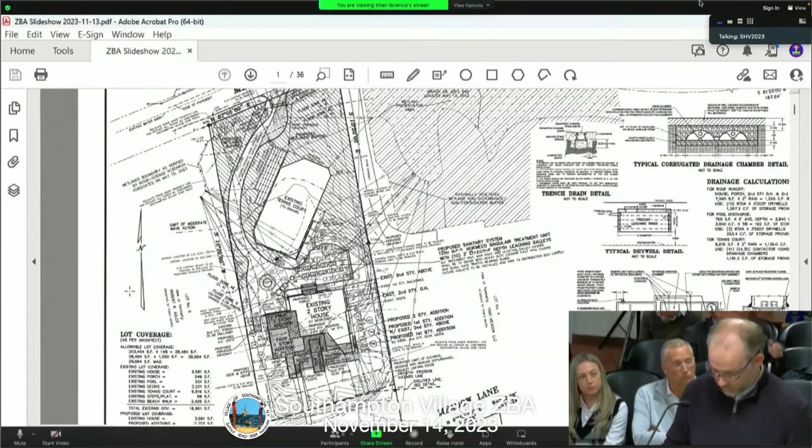So CMAC went and met with Tian and had a conversation about where the fence can go and how we may want to label it, because we're going to have to show a fence later on in order to comply with pool code requirements and such. So CMAC worked out a specific label. Instead of just saying deer fence to be removed, we have labeled it as deer fence, relocate fence inside property line, and replace all fences with conforming Southampton Village Code fence.

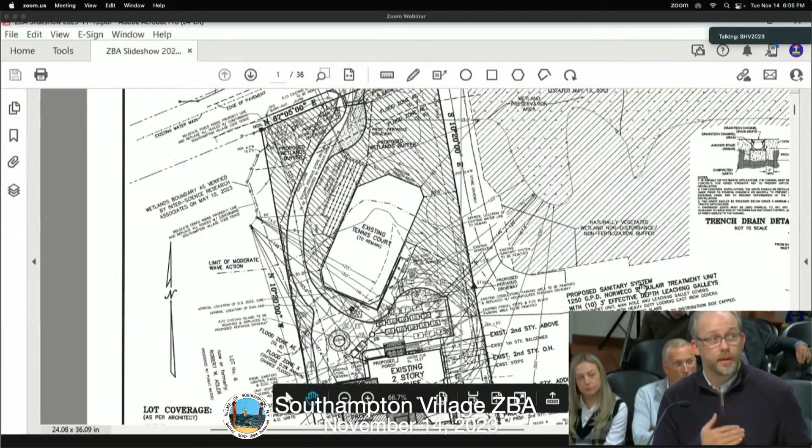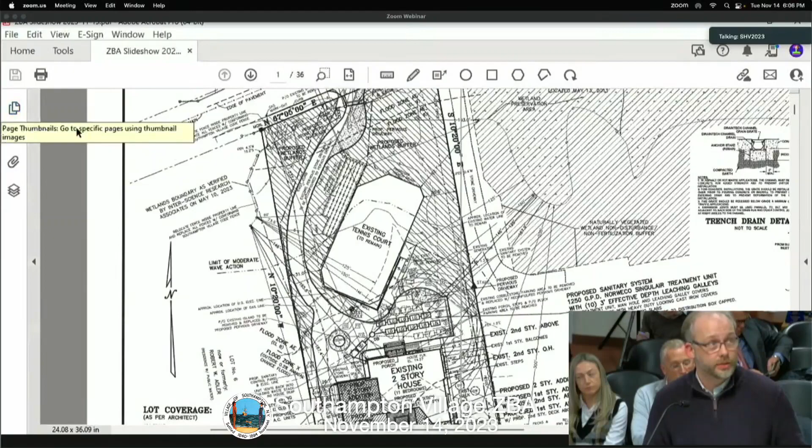So any fence that is shown on the plan right now, we've made sure that that is what we're going to do based on previous conversations with this board, and information that Alex Wallach had provided at the last meeting. Fences are not generally specifically referenced to this board, so we just want to make sure that the important part is that it will be removed off of the neighboring properties, the neighbor's property, and outside of the wetlands jurisdiction. But we're going to make sure to work with Tian on that later. But it's on this, so it would be part of the approval as part of that.

The second question, kind of broadly speaking, was about site drainage. Nelson Pope and Voorhis had asked us to evaluate whether site drainage would be adequately addressed with the proposed site plan.

So first to start, just note that there is no existing drainage at all. The house doesn't have anything. The tennis court doesn't have anything. There's no pool, dry well. There's nothing, and the existing driveway, which we have previously indicated and confirmed, is impervious. It's oil and stone with gravel on top of it. So we're changing the driveway out to be a pervious gravel driveway. It's going to have a 40% open void, so it will be able to contain its own runoff.

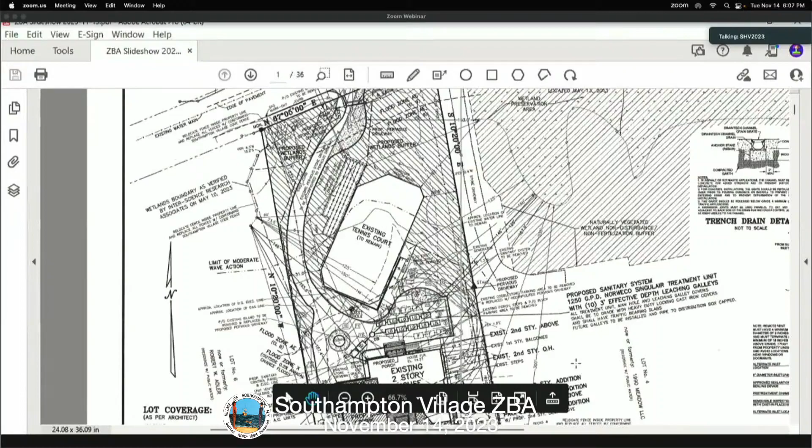In the event of some type of freezing or soil compaction, we are also going to be adding a trench drain at the entrance of the property to capture anything else, to make sure that anything from that area wouldn't get into the village's right-of-way.

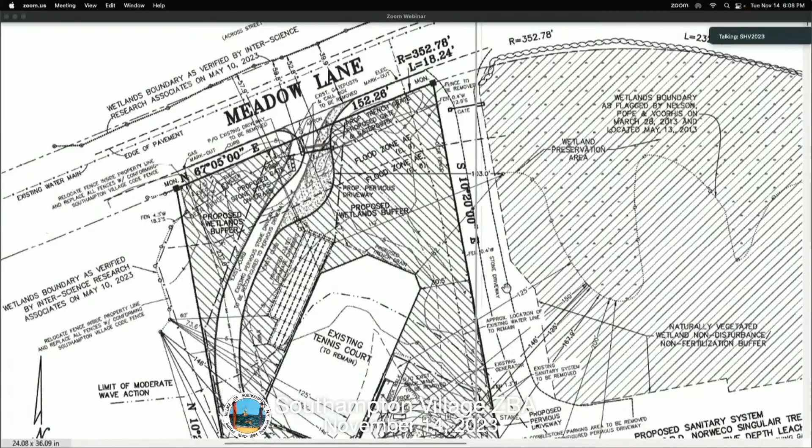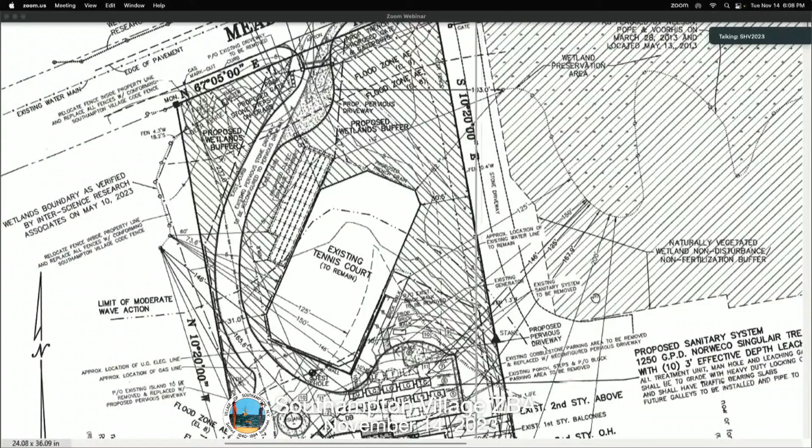As previously asked by this board, we had also added a Cultec drainage system for the tennis court, which is going to capture slightly more than what we have to, like 50 cubic feet over, but we are making sure to capture any drainage from the existing tennis court. We're also proposing drainage for the house where there currently is none.

In addition to drainage, after development we have also indicated where a proposed project limiting fence is going to go during construction, to ensure that during construction we don't have movement of soil and stormwater off the property, either to neighbors or onto the village right-of-way.

I also would just like to note that we are proposing to disturb less than 1 acre, so we won't need a stormwater pollution prevention plan. It's about 38,000 square feet or so. If we were closer, say at 42,000 instead of 43,560, I would probably recommend we do a SWPP anyway. But at 38,000, it's not like we're going to accidentally go over during construction. So that part has been addressed.

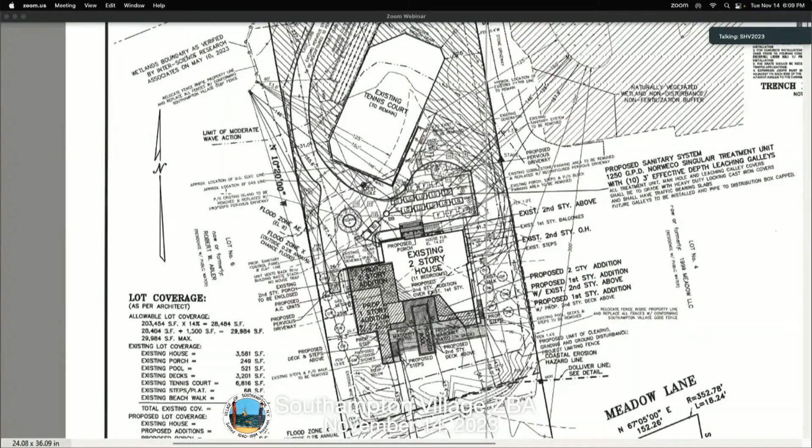So with the addition of drainage where there currently is none, we are improving the conditions of the property as a result of that.

One of the other things that Chick had asked us about, both in the meeting and in his memo, was whether we could expand the buffer to a setback of 125 feet.

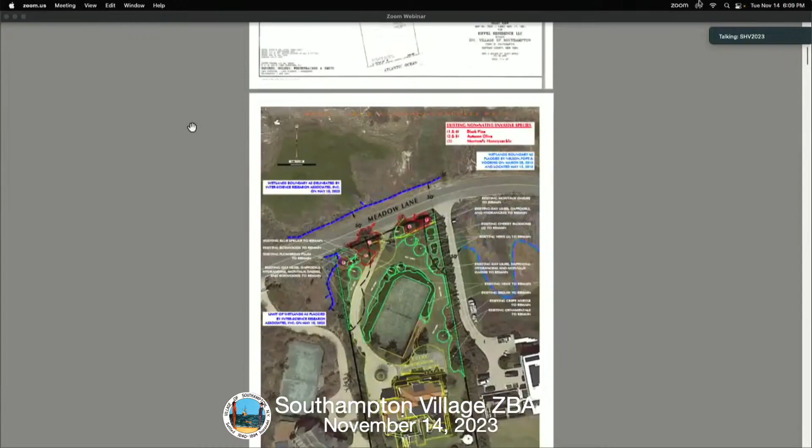Just stop on the existing conditions first, please. Oh, no, the existing planting. Yeah. This was previously submitted, but it's just important to see where existing lawn areas are. Existing lawn in those areas. There is ornamental vegetation that isn't lawn.

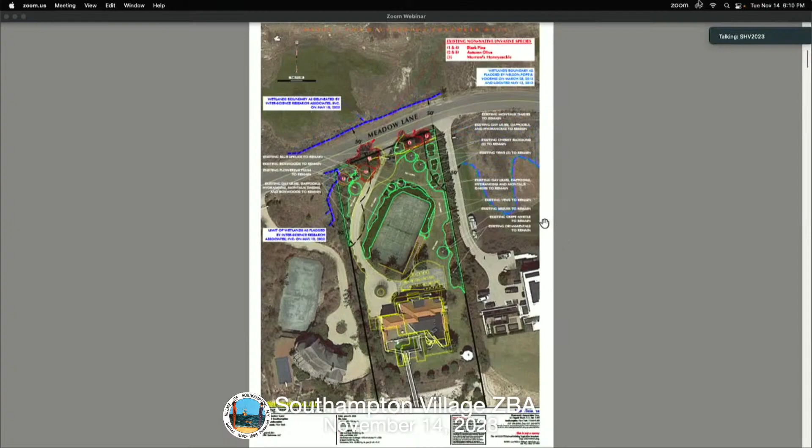Per previous discussions with Chick, he had said that we could keep any ornamental or landscape vegetation that wasn't considered invasive, that wouldn't spread into the buffer areas after taking out the lawn. So we identified a number of plants you can see in red at the north side, including some honeysuckles, black pines, autumn olive. All of the invasive species are going to be removed and replaced with either trees or shrubs, depending on what is being taken out. But existing landscape vegetation will remain.

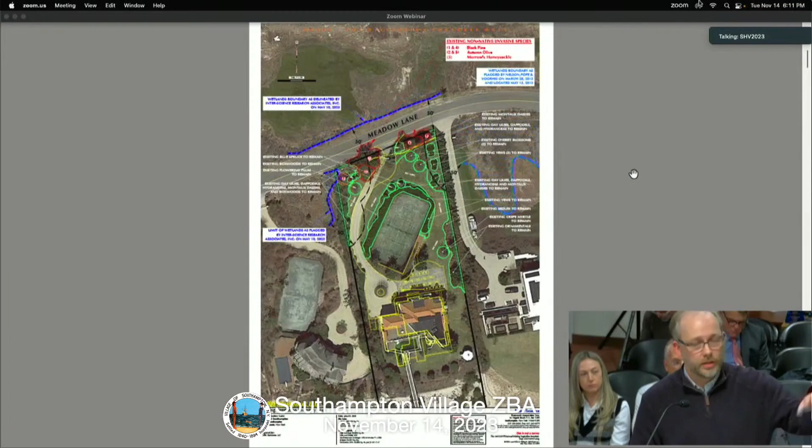Can you go to the next screen there? Previously we had proposed a 50-foot wide buffer, and we have increased the size of that to 125 feet, which you can see here. The areas of lawn are going to be planted with a mix of little blue stem and switchgrass, with some additional shrubs and trees spread out throughout that area.

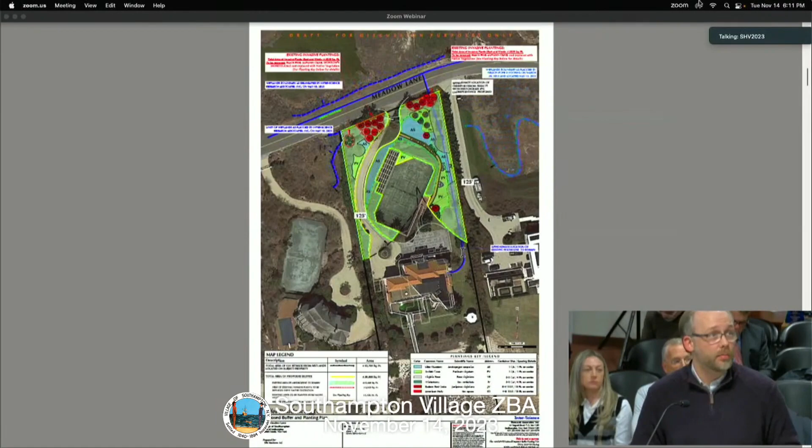There are some existing trees just to the northeast, Sabrina, of the tennis court, I just want to confirm. Yeah, so there are some existing cherry blossom trees that are going to remain, and we're planting around the base of them to make sure it's still a thoroughly contiguous buffer.

And then for the point of maintenance and also for access around the property and the tennis court, we're also proposing a 4-foot wide mulch path that goes around it, which is typical for wetland buffer drawings, especially where we're significantly increasing the amount of native vegetation on site.

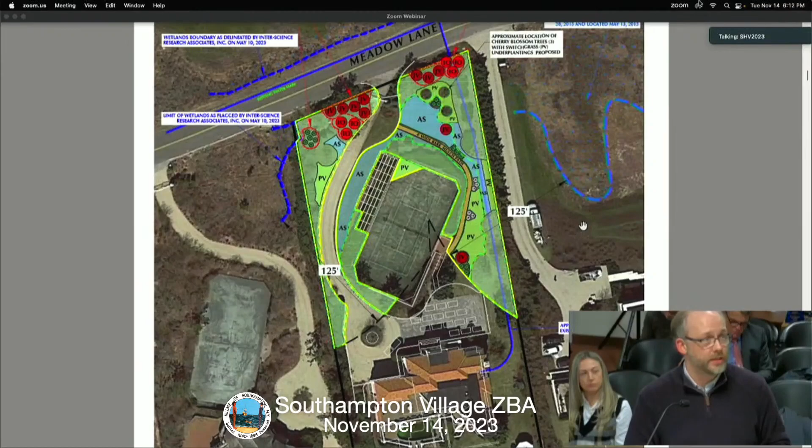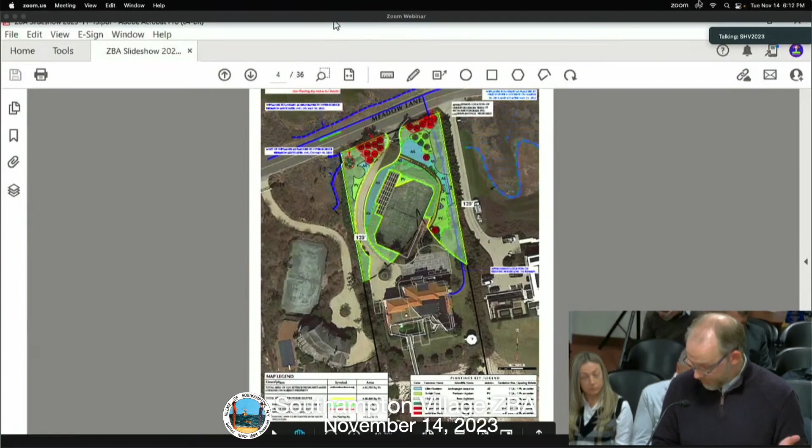To that end, we have increased the size of the buffer that was previously proposed. The previous one was 6,595 square feet. We've increased it to 20,408 square feet, so that's about 13,800 square feet more.

And we're also proposing to convert—I believe Sabrina's working on getting the previous plan side by side—there you go. The amount of lawn that we're converting to buffer area is 5,326 square feet. So we've really tried to, based on the village's consultants' comments, improve the environmental quality of the property, as well as the project itself.

In addition to the drainage that we're proposing and the buffer, just to remind the board, we're also upgrading the septic system to an IA OWTS. So as a result of all of this work we've been doing with the zoning board and the changes we've made, we think this project will wind up having an environmental benefit to the property if a wetlands permit is issued. And that's the end of my stuff.

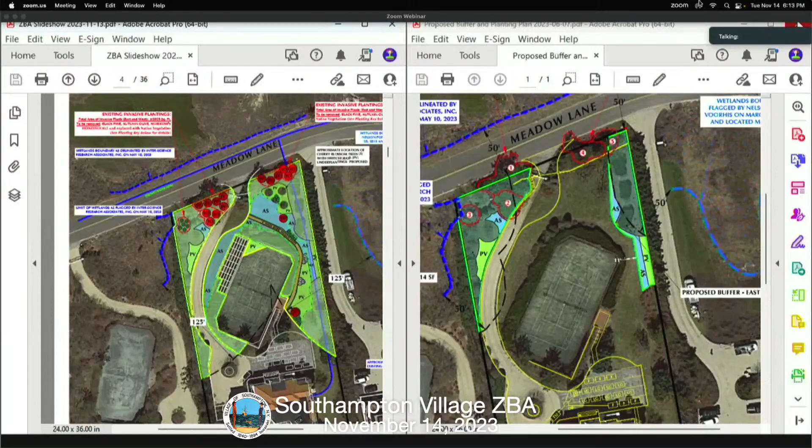CMAC, do you have anything to add? Basically updated numbers, making sure that CMAC and the architect confirmed the numbers are in accordance. The numbers I quoted you last time are correct, but now the survey has been updated to reflect that.

That's it, that's what we got. So we're here to answer questions. We've been at this for like 6 months or so, I think, so we'd love to wrap this process up.

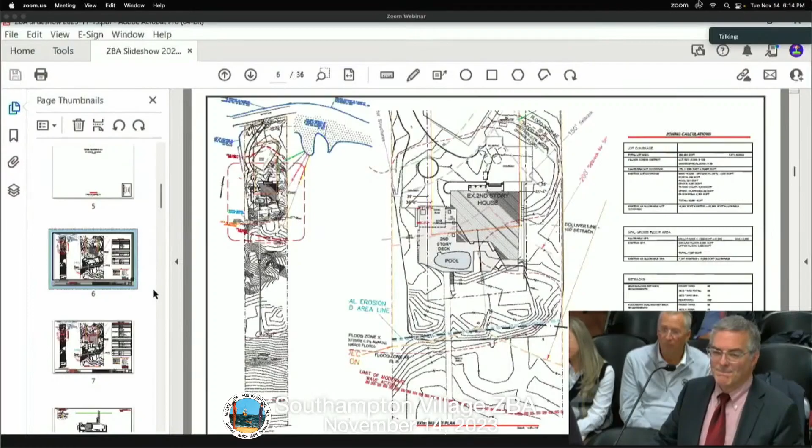Do you have questions? I do not. No, you're right. Can we find out if Joyce Gifford has questions? No, I don't. I mean, we definitely appreciate all the thoughtful work that you put in to bring this case to this point. Thank you. Indeed. Alex, did you want to say anything? No.

Okay, so where do you want to leave it? Do you want to adjourn for all purposes? Love to close. Okay, I'll motion to adjourn.

Mr. Chairman, is there anybody from the public, or anybody on Zoom, who wants to be heard? Is there anybody in the audience who wishes to be heard in case number 3156, 2020 Meadow Lane? Okay, so I'll motion to close for all purposes, case number 3156, Eiffel Residence LLC, 2020 Meadow Lane. Can I have a second? Second. And all in favor? Aye. Aye. Aye. Okay, thank you.

Next case we have is case number 3160, Gary Flanagan, 20 Hillcrest Lane. Is the applicant here?

I'll motion to adjourn case number 3160, Gary Flanagan, 20 Hillcrest Lane. Can I have a second? Second. Which date are we adjourning to? We're going to go to our next meeting in December. Alex, can you help me out with that? I believe it's December 12th. So I'll motion to adjourn case number 3160, Gary Flanagan, 20 Hillcrest Lane, to our next public hearing, December 12th. Can I have a second? Second. And all in favor? Aye. Aye. Aye. Okay, so moving on to

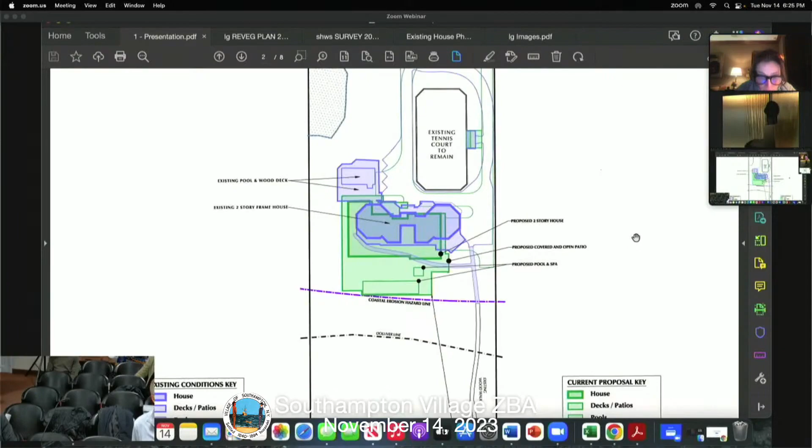So what we've shown here is the existing in blue and the proposed in green. You'll see in this area the retreat of the swimming pool back in this area. This is the coastal erosion hazard line. Here's the proposed swimming pool moving from here to here. This is covered decking on the upper part and lower decking down through here. This is the proposed home.

The next overlay we provided is an overlay of what had been approved in 2006 versus what is currently proposed. In this diagram, what had been approved is the blue, and you'll see that the swimming pool is no longer there. They approved the swimming pool going from there to this location in blue, and they approved the garage with a roof deck in this area.

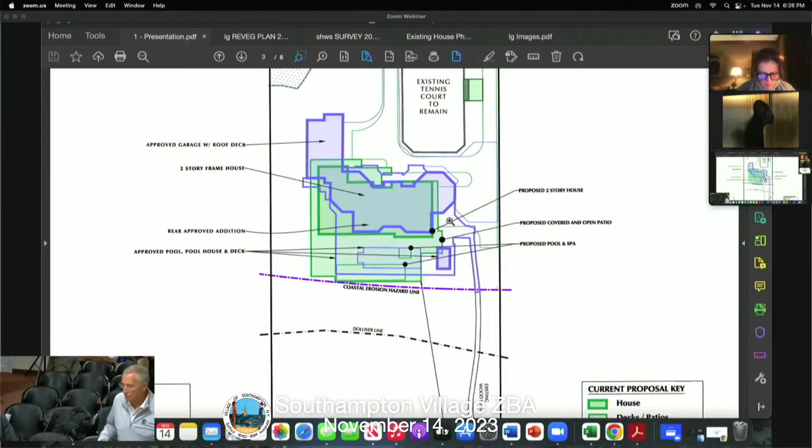Our proposal retreats from this setback from here down to this green line, which is decking, and the house back through here. The house is this bolder green line, and our swimming pool is here. So generally, the improvements we have proposed are relatively consistent with the footprint of the existing and proposed improvements, with the exception that we are showing retreat from the wetlands.

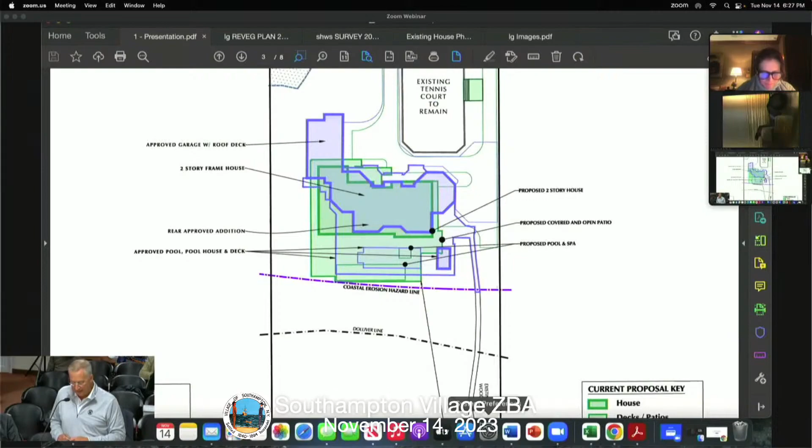As you're aware, this application requests relief from the 100-foot setback from the 1982 dune crest established, called the Dolliver Line. At the last hearing, Dr. Wisher discussed the history of the significant dune building and the seaward expansion of the dune feature on the property line. It's our opinion that because there's been such a gradual but dramatic change in the widening of the beach in this area and the dune conditions, the Dolliver Line is really a relic. It really should not be made applicable to construction today.

The coastal erosion hazard line that was established by coastal specialists from the New York State DEC really becomes an appropriate restrictive barrier for limiting the seaward edge of development. This project is entirely landward of that boundary.

Section 116-8D1 of the Village Code requires that on all ocean beach water frontage, all buildings and structures shall be set back 100 feet shoreward from the crest of the first rank of ocean beach dunes. The village has 6.7 miles of shoreline, about 35,260 linear feet. This provision of the 100-foot setback from the first rank of ocean beach dunes affects 5.5 miles of the village, about 80% of the shoreline.

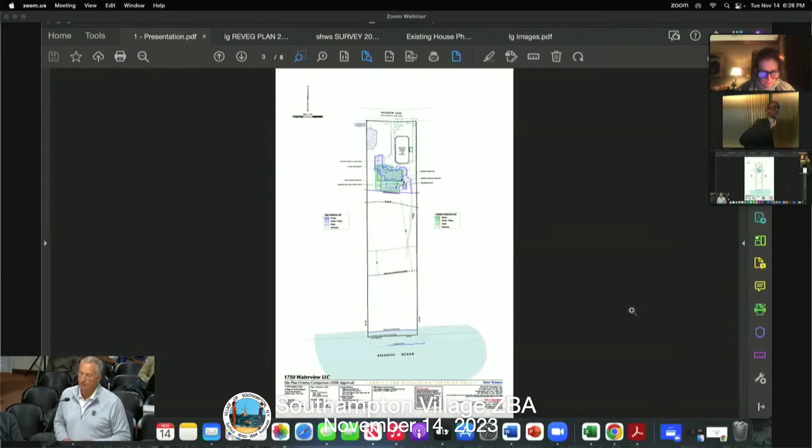The 1982 Dolliver Line restriction affects 1.1 miles of the shoreline, on the western part. When this line was established, it was mostly an undeveloped area—just west of, I think, the third or fourth house west of Road D. That whole section at the time had a dirt road, and homes were really just being considered in that area.

The property owners that you see today in this area are being subject to using a dune crest line that's 41 years old. It's not representative of the conditions that are here.

If you can put up the aerial. So this is a comparison of an aerial photograph on the top, which is 1983, the closest we could get to 1982. We marked the shoreline in this blue line, and transposed that over to what it looks like in 2023. You can see a dramatic growth. Look at where the property boundary lines are, look at where the beaches are. This is further evidence of what Lee Wisher had produced in the document, that this area is growing and it's also stable.

We also provided the next slide. This is an aerial from this section, which shows the Dolliver Line versus dune crest lines. This red line is the Dolliver Line. These are village-owned properties, so we don't have the Dolliver Line for that. But the Dolliver Line is in red, and these green lines you see are all from different surveys. Those you'll see some we don't have because that information was not available. But you can see the disparity between the Dolliver Line and the dune crest line on these properties. The Dolliver Line does not make sense in 2023.

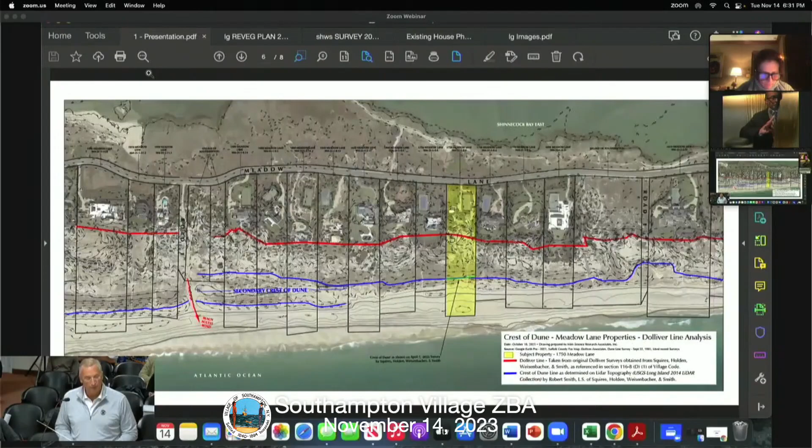The next drawing we also provided to you is one where we overlaid topography from LiDAR on top of the same aerial I just showed you. This is topographic information, 2-foot contours produced by U.S. Geologic Survey. Smith, Squires and Holden, who's our surveyor, is well respected and known. Their firm has 120 years of experience surveying in the village of Southampton. He's probably one of the most knowledgeable surveyors we've worked with. We asked him to identify the first rank of ocean beach dunes, which is what your section of the code speaks to.

That's the blue line. The Dolliver line is the red line. The blue line is where he says is the first rank of ocean beach dunes based upon topography. He saw there was a secondary dune system forming in this area, with the first rank of ocean beach dunes being out here, west of us. That's probably because of the groin and jetties from Shinnecock Inlet, further west, and this is just continuing to build out further the more west you go.

What's also interesting is we had him place on this drawing the location of the surveyed dune crest line from a site-specific survey on our property, shown as the green line. You can see that the green line and the blue line, taken from the LiDAR maps, are coterminous — they're on top of each other. So it gives you some sense of assurance that the lines he's drawn are accurate.

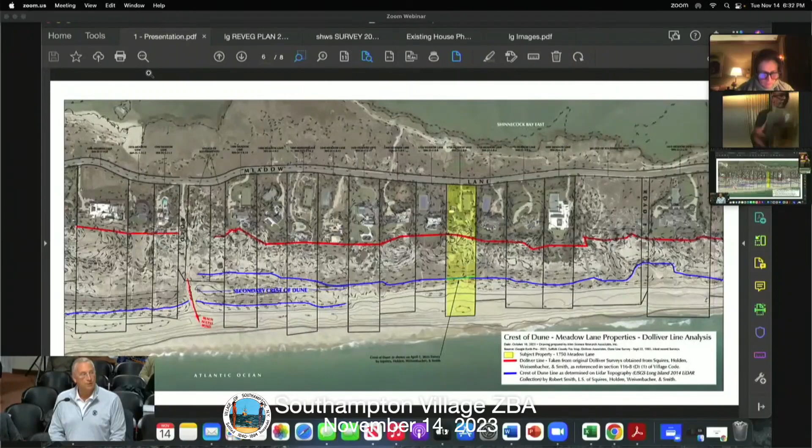So the drawings we're required to use are showing 41-year-old dune crest lines. Bob Smith also provided us a letter that you have in your file, stamped and signed, stating it's his opinion the Dolliver line is no longer relevant as the dunes have replenished themselves naturally. However, the Dolliver line still remains part of the code.

The improvements on this site are proposed 330 feet from the first rank of ocean beach dunes, where your village, for 80% of the village, requires a 100-foot setback. We're not asking to go to that 100-foot setback. We're asking to be able to go to the coastal erosion hazard line, which is a more appropriate seaward boundary.

We also provided you, back in the September meeting, an aerial photograph, and this is that photograph showing the location of our improvements as they relate to the houses to the east and west of our home. This is an overlay of the proposal on top of an aerial photograph showing existing conditions. What we did, as part of the design strategy with the client, was make sure they weren't going to interfere with the neighbors, because I think that's important.

So we had two lines drawn: a line showing the seaward edge of the homes, the seaward edge of the front home. Our house is behind that. Front of the pool, our pool's behind that. We wanted to be sure that we're sensitive to the neighbors.

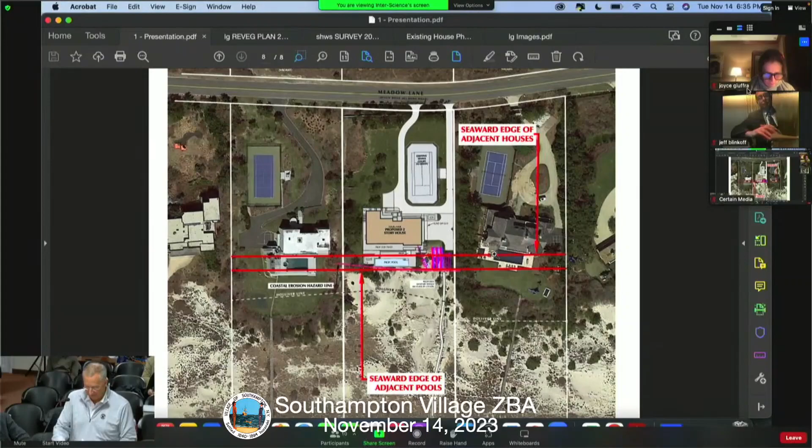We received the Nelson Pope and Voorhis memo last Thursday at 10 o'clock. Your filing deadline for additional information was 12 o'clock Thursday, so we couldn't actually respond. But I want to go through a couple of the things with you just to let you know that we are going to respond back, hopefully in a helpful way. They identified a number of things in their memo that they asked us to respond to.

They asked us to modify the plant inventory to include additional diversity of native plants. LaGuardia Design is working on that now. So we'll be back to you at the next meeting with some additional details on the landscape plan.

Even though the plan includes considerable retreat of the overall structures from wetlands, item 22 and 27 discusses the position of the improvements in the northwest corner. That's this right here, and its relationship to wetlands, and speak about its degree of nonconformity to the wetland setback. Stelle Lomont Rouhani, the architects for the project, are examining that right now to see if we can address that issue to ease up some of that setback in that corner for you.

Although, again, we'd ask you to recognize that the wetlands in this area are deteriorated. They've been that way for some time, and they're of low quality, which will only improve with the work that we're doing. Item 25 and 28 indicate there's no separation between the seaward edge of the pool and the beachfront area and the dunes.

So I actually question whether or not the reviewer spent a lot of time looking at this, because I understand they're saying that this area through here, and actually the quote in the memo says, the beachfront area, including the top of nearby dunes, where neighboring properties each have landscaped and naturally vegetated areas, separating their pools from the beachfront areas and dunes. So our client wants to have a duneland habitat.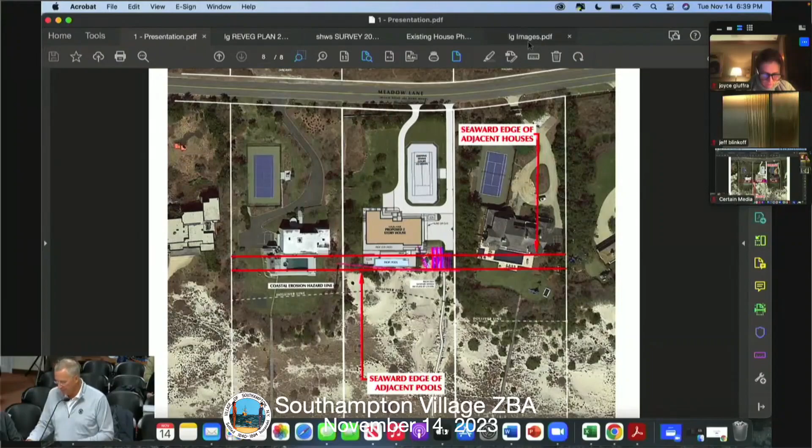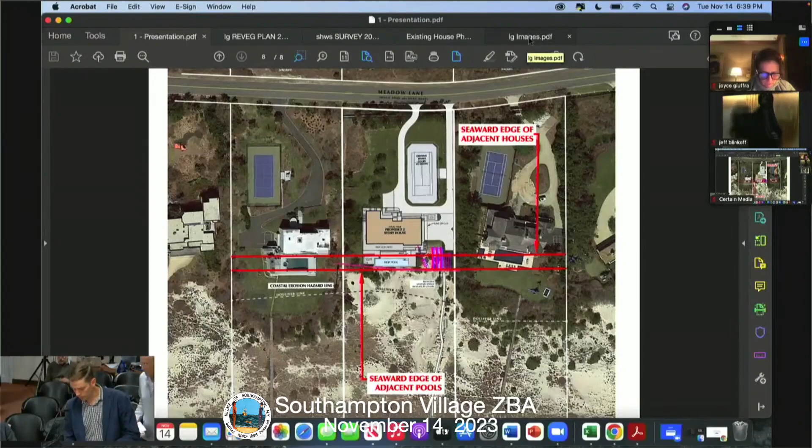I'm going to turn the presentation over to Ian Hambeck, just to talk a little bit about the landscape plan that's been submitted to you, and then we're here to answer any questions you might have. Ian Hambeck with LaGuardia Design for the applicant.

I think Rich touched on a lot of the great aspects of this project. I'm going to go over a few of those again at a high level and then touch on some things on the freshwater side that he didn't necessarily focus on or speak to in detail.

I'll start by saying at our firm, when we take on a project, we ask ourselves three questions - this is our litmus test. Is it an interesting project? Does our shared vision with the client align? And are we going to make a meaningful impact through our role as landscape architects on the project?

When you think about the interesting question, this is obviously the type of project every designer wants to be involved with - coastal project, blue chip quality. I'd say that aside from the panoramic views you get on the ocean side looking out over the beach, we view the freshwater wetlands as equal to that in terms of interest and quality.

When we initially met with the client, we shared that vision with them - that we thought the freshwater wetland relationship needed to be played up, improved, and restored. They met that enthusiasm and embraced the idea. They actually said it was a shame that the property was of such poor environmental quality, dominated by ornamental landscape and lawn, and they wanted to see that restored.

So when we start to think about this shared vision and the enthusiasm around it, we have to ask ourselves, through our design process and the regulatory process, are we able to make that meaningful impact? I think when you look at this application, the answer is yes. As Rich pointed out, on the existing property right now, it's a low-quality wetland - it's filled with Phragmites, there's a lot of lawn, a lot of ornamentals, but no natives of real note.

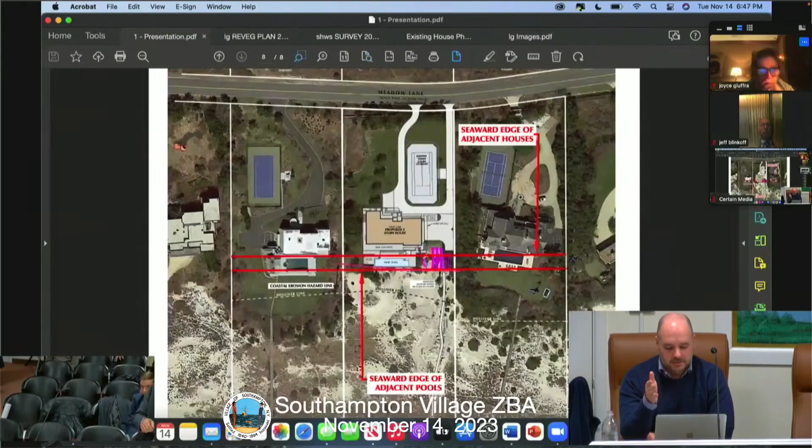That's in chapter 116 - I put my notes back there. But it's the first rank of ocean beach dunes that 80% of this village gets to use, and this is the first rank of ocean beach dunes on this property. First rank. First rank. So then where is the second rank forming, northward?

Second rank is probably some relic that's back in through here somewhere. We'd have to actually look to see where that is, but our position is that the coastal erosion hazard line, when you look topographically, doesn't even follow a crest of dune. It goes through hollows, and it was an attempt to create something like a coastal erosion line back then when there wasn't one. But this is a completely barren area that's relatively undeveloped at the time. How do we control development when you've got this first rank of ocean beach dunes? Oh, let's just shove it way back so it doesn't happen out in this area. But we now have better science now, and there's been such a change in the beach conditions since that was done, that these dunes have grown.

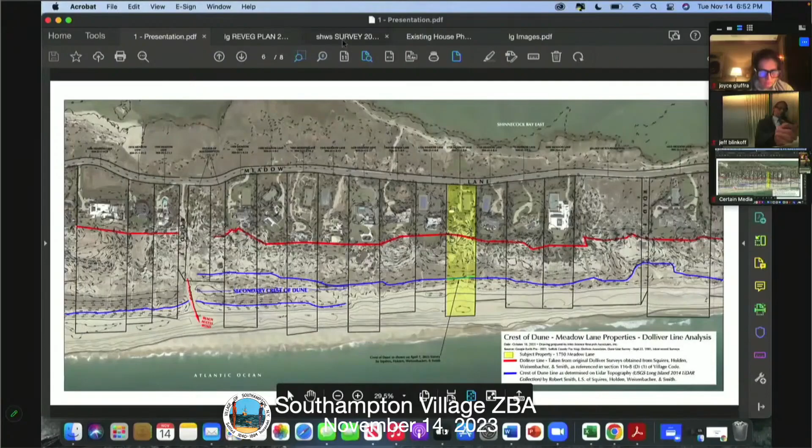And John, for sanitary systems, 200 feet seems to be the standard out here. I think 200 feet is the village regulation, the most stringent. No, what I'm saying is Southampton Town is the same. No, 150. Ian, what did we do on Noyac Road? Well, we're well beyond it, but... Okay, never mind. The town code is 150. I will represent that to you. Okay.

Here's the wetlands line up here. This is the access stairway in front, on the north side of the home. Those on Zoom can't see that, just so you know. While you're looking at that, just to fill the jurisdictional gap, the Suffolk County setback for a septic system is 100 feet from surface waters. Am I correct? So we're trying to meet the most stringent village standard. Do you mind zooming out a little bit?

This is when you need the music from Jeopardy. Okay, well, I get the gist. It's on the northwest corner of the house. I don't have any other questions.

Do you have any questions? Do we have any public? Wait, let's wait - Joyce, does anyone have any questions? Joyce, can you hear us? This is on mute. Yeah, her thing is muted. I think she's muted. She's trying to speak. No, I'm good, thank you. Sorry about that. Is there anybody from the audience who wishes to be heard, or Sage, is there anybody on Zoom that wants to be heard?

So we want to adjourn this to the next meeting on December 12th? Yes. Does that provide ample time to address everything? Yeah, we have a memo now. Excellent. And we'll take the comment about the Dropbox under advisement and see what can be done to organize that - no criticism of anybody in this room. Yeah, we understand.

Okay, so I'll motion to adjourn - let me get the right case number, excuse me. Case number 3155, 1750 Waterview LLC, 1750 Meadow Lane. I'll motion to adjourn this case to our next public hearing, December 12th. Can I have a second? Second. All in favor? Aye. Great, thanks for listening.

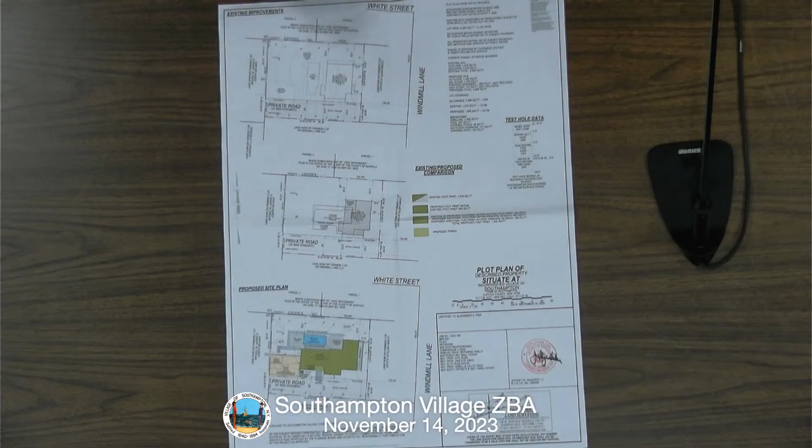Bailey, you'll correct me, you probably know the file better than I do. What we've tried to demonstrate here is what I was about to say: the bulk of the proposal is either located in a conforming location or where the pre-existing improvements are located.

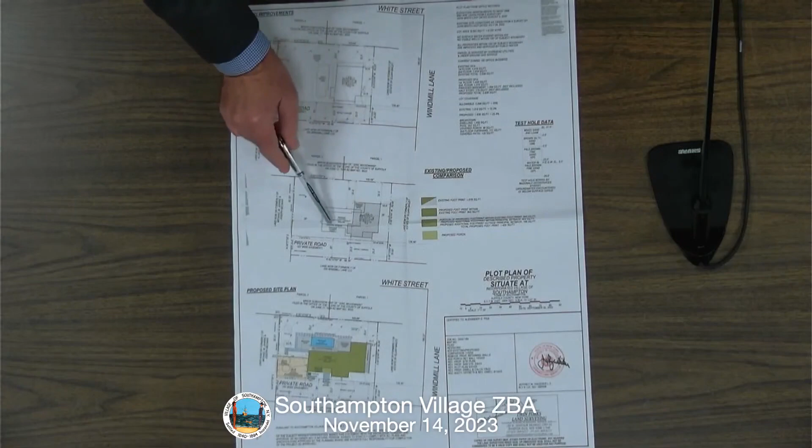These are the pre-existing improvements, that's the proposed addition, that's the proposal. We wanted to show you where the existing two-family dwelling is, and then compare it to the new proposal. But the bulk of this either respects the pre-existing non-conforming setbacks or is in an area that is as of right in terms of the setbacks.

Now, it's interesting what's going on here in terms of the setbacks, because our position is that the setbacks, and it's not only based upon our reading of the code, but also the way the village has handled lots on this access easement, including the lot at 205 Windmill to the south.

The property is a pre-existing non-conforming lot burdened by the presence of a 20-foot wide access easement along the southerly property line. This is really important because it shows that the requests for relief are nowhere near as significant a dimensional request as the building inspector claims.

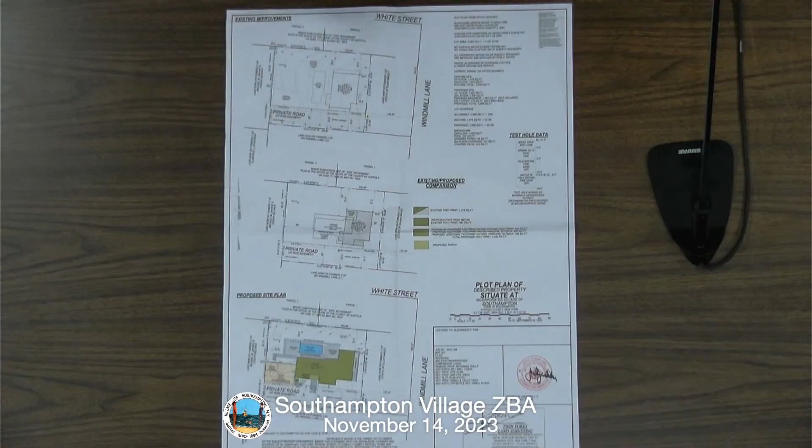So there's this 20-foot access easement. The surveyors called it a private road, but it's really not a road under the village definition. Let me explain to you why.

The easement serves as access to 4 residentially developed parcels to the west of the subject property. You go up the street, and there are houses up there, as everyone is aware.

So the applicant is the owner of tax parcel 904-5130. We included a copy of the deed in the application package, which includes the access easement over the property. The parcel runs beyond the southerly limit of the asphalt surface. So here's this access easement, but the property runs to the south, well south of the paved area.

This is the entire parcel. It includes this access easement. And I keep calling it an access easement because it's not a road, it's not a street.

This is the Village Code definition, 116-2. I want to remind everybody that the Court of Appeals has, on probably three occasions, said that zoning laws are in derogation of common law and are to be construed against the municipality.

So if there's any gap that hasn't been closed in this definition, I'm going to explain to you that there's a big gap as it relates to this access easement. If there's any gap, it runs in favor of the applicant. So this is the definition of a street.

Why am I going through this? Because it makes the application for relief much less significant. This is the definition: any federal, state, county, or municipal highway or road - none of those - or any street shown upon a subdivision plat filed in the county clerk's office. It's not one of those. There's no subdivision. These are what we call in the business described parcels.

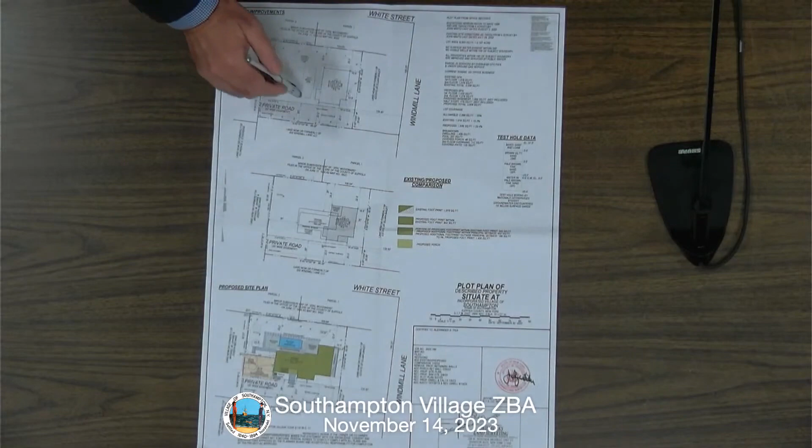Thus, it's submitted that the northerly limit of the access easement, which does not fall within the definition of street, should not be utilized in calculating the lot line front for purposes of setback, which is what the building inspector did. He took it from the northerly line; it should be from the southerly line of this access easement.

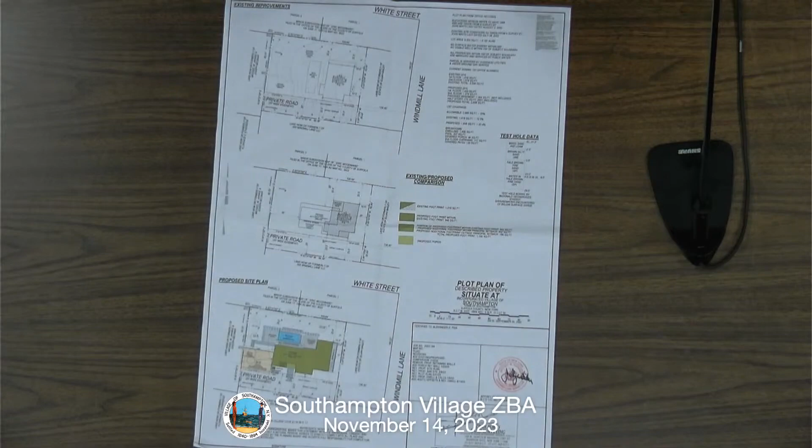Although relief from the front yard setback of 35 feet is still required to construct a portion of the proposed residence, it is submitted the relief needed is to construct the proposed residence 23.5 feet from the front yard, where 23.3 is existing, rather than the indicated 3.5 feet of setback relief in the turn-down letter. So we want to construct a proposed residence at 23.5, where 23.3 is existing.

And it should not be taken from the northerly side, but rather the southerly side of that access easement. We also object to the inclusion of the area within the private access easement in the overall lot area. Village Code 116-2 defines lot area as the total horizontal area of a lot, exclusive of land in the bed of any street, right-of-way, or waterway. It's none of those.

Accordingly, since the access easement of the subject property is demonstrably not a street as defined within the Village Code, the entirety of the parcel, including the portion burdened by the access easement, should be included in determining the lot area.

We submit this by definition alone, that our interpretation is correct, and we see no other fair or reasonable interpretation under the case law, where it says any ambiguity is supposed to go in our favor. We don't think there's an ambiguity here. It just isn't captured - this access easement is not captured within the specific definition of a road or a street.

But we also included in our application a copy of a survey for the adjacent property to the west, 205B Windmill Lane, where a building permit was issued for the construction of a proposed swimming pool. The front yard setback was permitted to be measured from the southern limit of the property, not the northerly boundary line or access easement across the property.

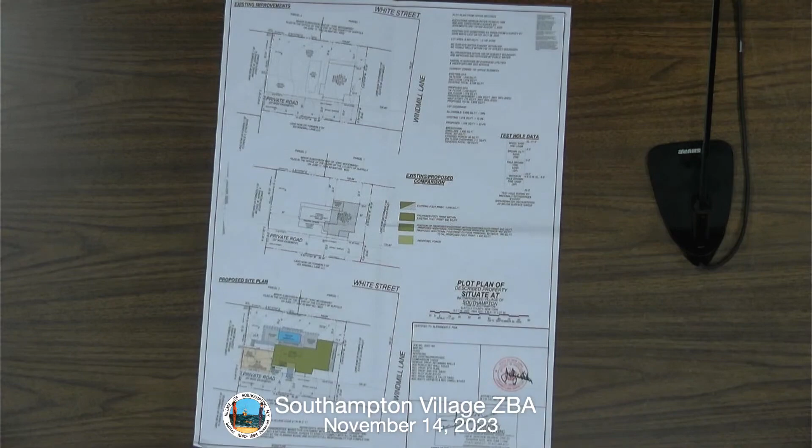Excuse me? Yeah, John, do you have a copy of the agenda? Because that's what we're looking at right now. Billy, that's incorrect? That's incorrect. Okay, but if you could speak to 5.3. Yeah, no, our survey shows on here, sorry, I just moved it on you, 3.5. Okay, so it's 3.5, not 5.3.

And what we're saying is that the 20-foot right-of-way should be included, included. So we would have 23.5 as our front yard setback. That's what I'm trying to find. That's helpful, thank you.

And that argument is, we say, is not only buoyed by the law, but also the way the village has dealt with the other parcels on this. If we were to agree with your

contestment of some of these interpretations, would that change the design of the house in any way? No, it just makes the variance less in magnitude. Which helps you. Yeah, if you look at all the literature, the case law, and the statute, and everything, one of the things that you look at is the magnitude of the variance.

The more de minimis, yep, I'm with you. So it's important. It exists where it exists now, and we're really not trying to further encroach into it in any way, but we also are looking for some additional square footage. So to the extent that, in exchange for that.

No, I'm just trying to understand your view versus the building inspector's view, so this is helpful. Thank you. And I wouldn't make a big deal of it, other than the fact that I have to go through the exercise to demonstrate that the magnitude of the variance isn't as much as it appears. Yep, that's all, I got you.

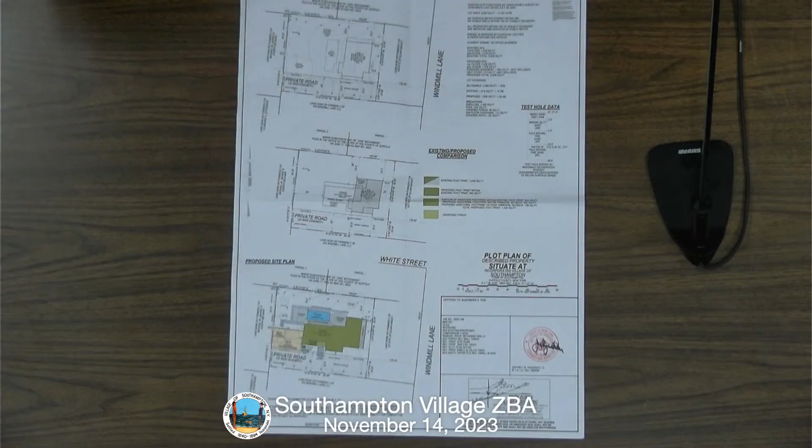Now, I lost my way. Oh, rear yard setback, excuse me. The rear, thank you. The existing—Bailey, if you want to take the board through the existing rear yard setback and what's proposed.

Sure, the existing house maintains a 23.3 foot rear yard setback, and what we're proposing is to maintain 22.4. So just a slight increase, essentially where the existing house is right now. No further encroachment in the rear yard is requested.

Wait, this says 30 feet? Is that a typo also? No, 30 feet is required. Oh, sorry, yeah. Okay, 30 feet is required, correct. So seeking what, like 7.6 feet of relief in the rear yard. Exactly.

Exactly. But it's in an area that's already improved. But then when you move to the west—correct me if I'm wrong—we increase the setback and come into conformity with the required setback.

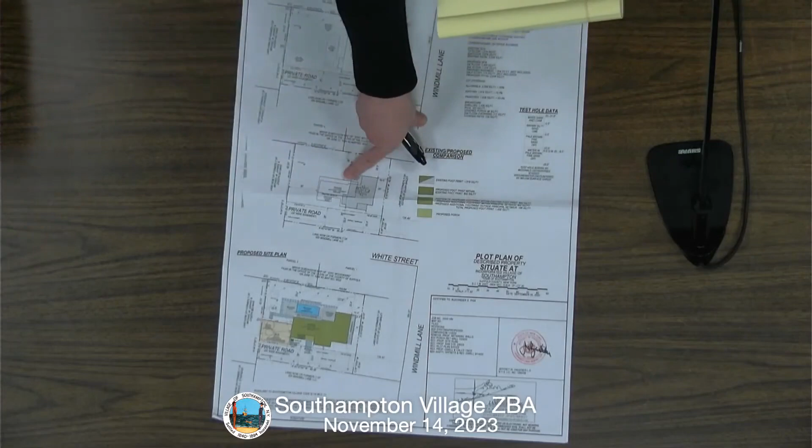This blue square here is actually the only conforming portion of the property for setback. So when they expanded the house, what they tried to do is propose any additional square footage as much as possible within that conforming location.

There is a little bit of a porch area that doesn't, but that's in the front, and we can talk about that. But I said to Mr. Pizzo...

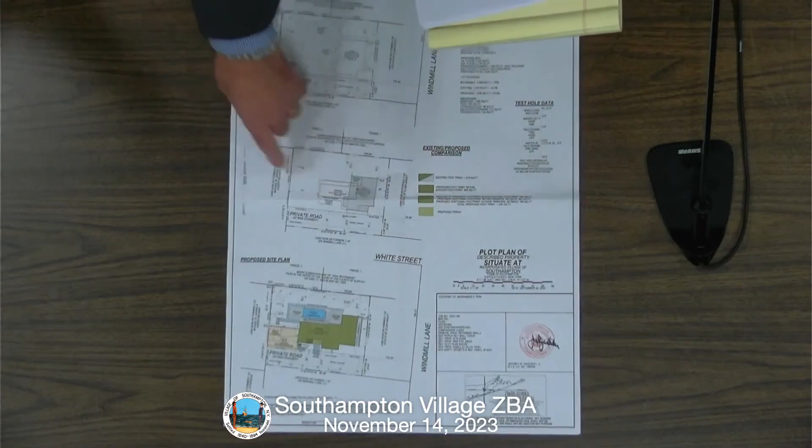...when he had his architect design the house, the bulk of this new area, I want you to conform. And then this area would take advantage of the pre-existing non-conforming setbacks, hopefully.

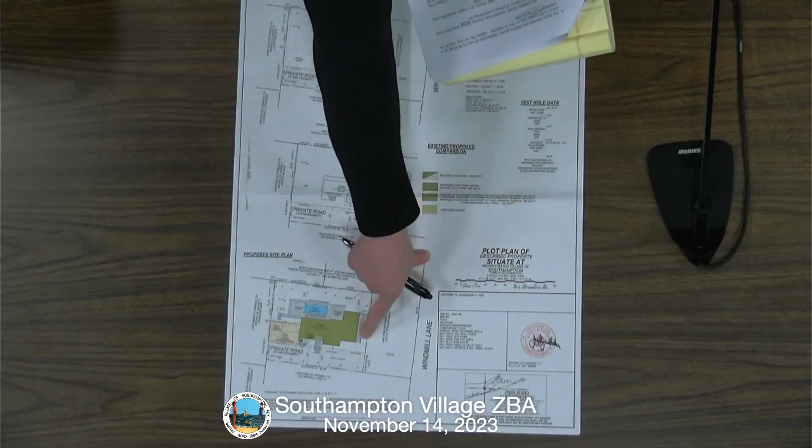Then, I'm just trying to get through them—basement egress stair. There's an egress staircase 5.4 feet from the property line. This is the denial where 30 feet is required and 10.4 is existing.

I was a little bit surprised at this because you've probably seen this yourself, Luke. Usually the village has given you 4 feet of encroachment for a stairwell. It's sort of like a Bilco basement door access. Yeah, and four feet is what the town gives you.

Okay, but I don't know about the village. Well, I know as a matter of practice, they've adopted that. Right, I know they held the line at 4 feet.

I had this conversation both with John Foster when he was here and Chris Talbot. They said they wanted to hold the line at 4 feet. It was similar to a Bilco door, or even sometimes even less.

But what happened was people were getting greedy. They would—the next thing you know, you'd have almost like an outdoor seating area, full-on walkout patios, crazy. Do you have anything from a planning perspective on that?

My understanding is the building department allows 4 feet of encroachment only when it complies with the side yard setback for zoning. So because this doesn't comply with the side yard, they don't allow that level of encroachment.

Makes no sense at all. I do find that to be sort of overlapping directives, and I just had this conversation in a town hall last week.

Are you proposing for it to have concrete walls or like a landscaping wall? Well, it's gonna be a concrete retaining wall, but if you wanted to have anything to buffer, a cap on it or something like that, sure, we would do that.

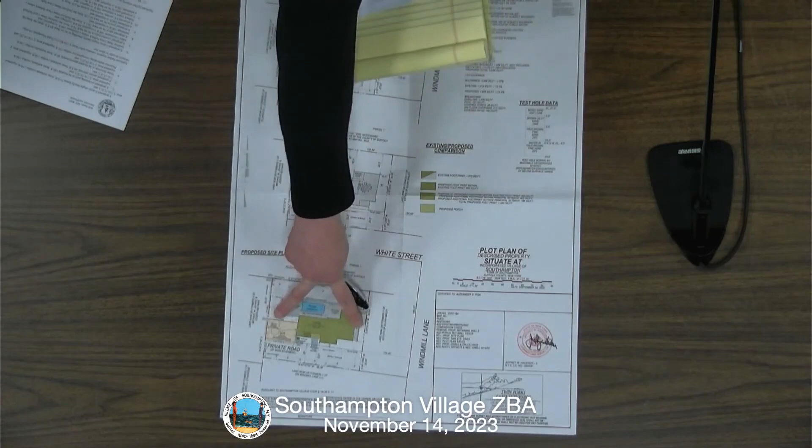Although we meet the minimum side yard setback to the west. Correct. What is the total side yard? 60 is required, and we're at 41.2.

Is that different if it was a residential zone, Alex? It's a 60-foot aggregate side yard requirement in the OD zone.

Would it be different if this was a residential zone? I believe every zone has its own requirements, and depending on lot size as well. Oh, if it was based solely on lot size? Yes, and you were in a residential zone, it would be wildly different - it would be much smaller.

Right, much smaller, so you would probably meet it - essentially you're trying to convert this lot into a single-family residential lot. Are you meeting, if this were a residential lot of this size, the GFA requirements?

10,000, probably not - let me think about this. Well, let me do a quick calculation. What's the size of the lot? It depends on how you calculate the size of the lot. In the liberal way of defining it, including the easement or right-of-way, what's the size of the lot? It's 8,263, so what's that times 10, so it's 1,500 plus 8?

About 2,300. Because I think, John, speaking only for myself, I want to be sympathetic to your request to make this a single-family residence, but I do want to apply single-family residential setbacks and GFA to it. I understand GFA is not a requirement for the OD or OB zone, but if there's going to be a house, it should meet residential requirements.

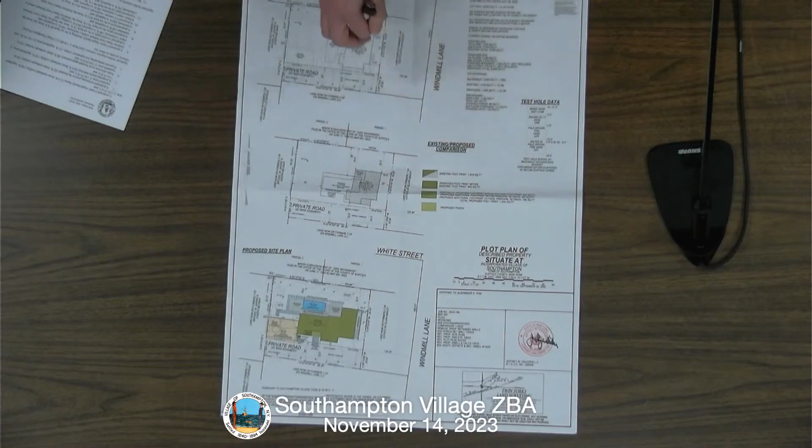4,019 square feet. Is that right? No, no, 1,019 square feet. There you go. It's about 2,000 square feet. About 2,000.

And Alex, as the planner, if you have input or guidance here, we're all ears. I don't have a memo. If the house is only 1,019 square feet right now, and one floor... It's a two-story residence, and you're going to two floors. No, it's two stories existing right now. It has a footprint of 1,019. Let's get the square footage number for you, not an exact guess.

Let's get the number for you. And current square footage, that's the question, Mark, as well as Louise. And what's the proposed square footage?

2,800. I'm sorry, I didn't mean to interrupt. I guess I'm looking to Alex for guidance, and you don't have to answer right now, but if we were going to apply residential zoning to this based upon the lot size, what would our zoning code dictate in terms of setbacks, lot coverage, building coverage, and especially GFA? You'd have to speculate a little bit because there's a lot of different residential zoning districts in the code.

No, it's fair, it's in the code. Let me see if I can find it. Like we can assign it the smallest one, probably, right? It'll be the smallest one. Well, you can't, because if it's office district, it's office district. I know, I'm trying to do it by analogy. I understand what Luke's doing.

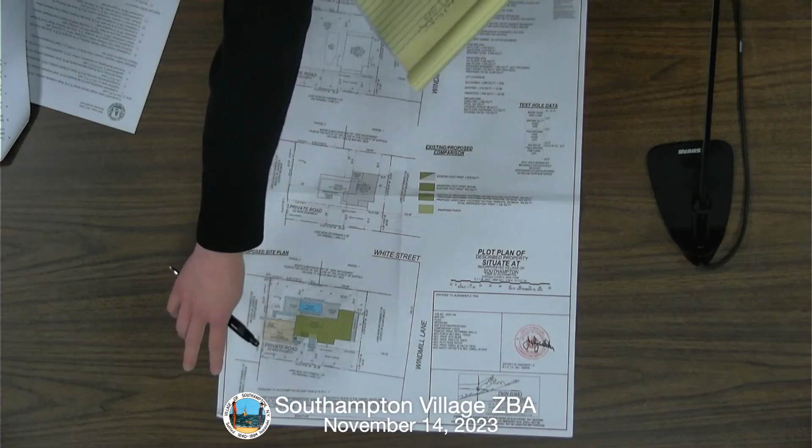The two additional residential parcels that are on this easement do not actually have any portion of the easement on it. It's only on this property and the adjacent property to the west. And the adjacent property to the west was allowed to include that easement within their lot area.

Doesn't it affect 209 Windmill to the east? To the east, the undeveloped parcel here. Oh, that's 211, right? Yeah. And then what about 209? 209, it's not part of that lot? I honestly don't have the survey in front of me for that one, but I can check.

Just let me get this for you, because it's an interesting question. If you could just be patient with me for a second. I should know it by heart, I'm sorry. So Alex and John, correct me if I'm wrong, but if we are being asked to issue a

special exception to make it residential, we will have to apply some zoning standards. You would apply the zoning standards of the district that it's in, which is the OD office district. But by analogy, just say it's less than 12,500. The front yard's 25. The minimum total for the side yard abutting the street on the corner is 25 feet.

The rear yard is 25. They're much smaller. The total side yard, can't find it... oh, it's based on 4/10. Yeah, it would be 4/10, which is, how wide is it, about 100 feet? It's about 100 feet, so 4/10 of 100 is 40, which is the total side yard, which we meet now, and 4/10 of that is 16 feet.

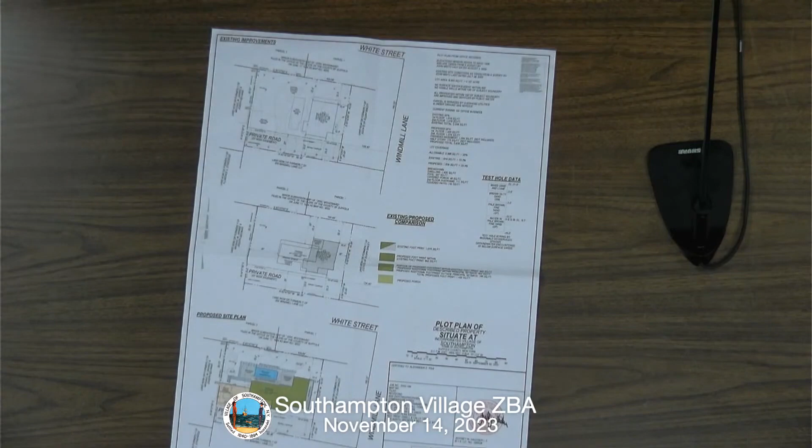Good evening, Jason Berg, B-E-R-G. My family and I live at 217 Windmill Lane, right at the top of the hill. We're one of the four houses that shares the right-of-way going through 213. My neighbors and I submitted a letter to the board, so I want to make sure you've received that - it contains the majority of our comments, or at least the key ones. But I'd like to say our main concern is to ensure we still have access to the right-of-way.

I think the setbacks, and thereby the parking or lack thereof, is really our main concern. The size of the house feeds into the amount of parking required. It's stated as a 4-bedroom house at 2,800 to 2,900 square feet, but if you look at the full area, including the finished basement and attic, you could really sleep 6 bedrooms, even if the attic isn't code. We'd like to make sure whatever house is approved has sufficient parking, so additional cars don't end up blocking our right-of-way and causing safety issues - ambulance access, fire trucks, etc. We'd like to see this house renovated and have someone live there, and just want to see that it's appropriate for the neighborhood.

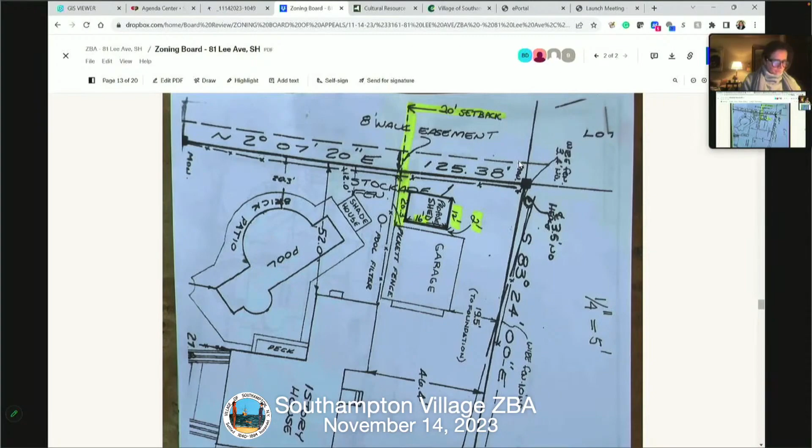But who drew it on the survey? Did the surveyor place it on the survey? Yes, somebody did it professionally, on top of the survey. Was an original copy of the survey submitted to the ZBA? Yes, yes, I believe this is what we have in the application. There were some other documents as well, like this document, which is a copy of the survey.

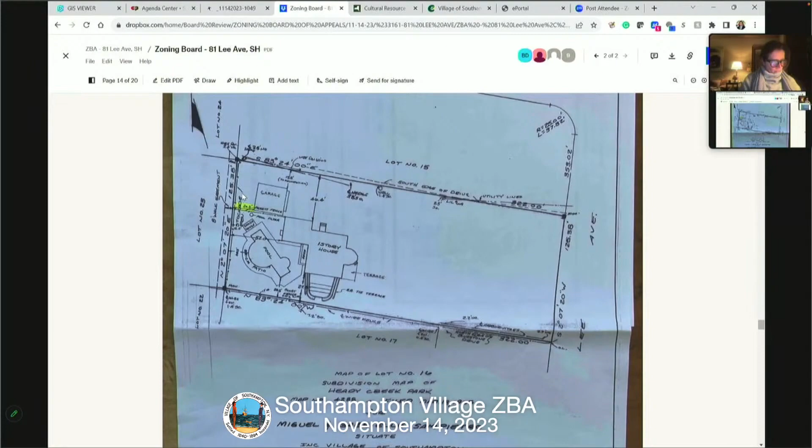But in other words, do we have enough on record that would show exactly when it was built, if it conformed with what we're seeing here? Yes, I believe so, and it would be built according to the board's decision in terms of setbacks, and the building inspectors would have to verify that in the field. Joyce, do you have any questions? No, I don't think so. I think my only concern has been addressed, in terms of the garage not being visible from Lee Avenue and there being sufficient screening here with a hedge.

Sorry, we have the whole property in the backyard covered by a 6-foot fence. In addition, we have trees, some of which date back over 25 years, all over the property. On our side and on the neighbor's side, those are probably older than that because they are enormous.

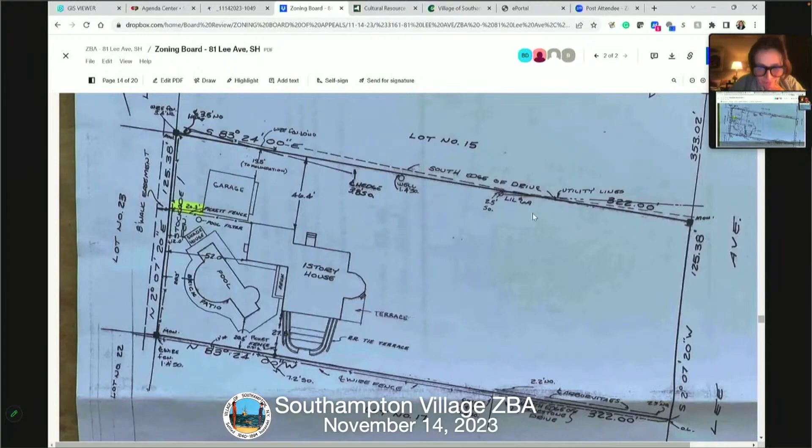And all this is covered by enormous trees. Is there a way you're able to show a visual? We did provide photographs of that area. We're going to put that on the screen too. Some of the trees. Okay, great, thank you. This is very helpful, thank you. Alex, go to the next photo.

As you see, the hedge that I was talking about covers the garage. There's no way to see the garage. We are talking about locating a shed behind the garage. There's no way that you can see that. This is the garage, and behind the garage. Okay, thank you so much.

What's the reason for the separation requirement? The separation requirement, I believe, is 20 feet, and it will be 6 feet in that area. Right, I think the chair is asking about the requirement that buildings be separated from one another. Yes, I believe it's 5 feet. Is it 5 feet to 2 feet? Correct, that's your request, right? Yes. I don't know that the code gives the trustees legislative intent on that. I think it's probably for aesthetic purposes and also to ensure that buildings are not combined into the same building. It's the same requirement that accessory buildings be set off 5 feet from their primary structures.

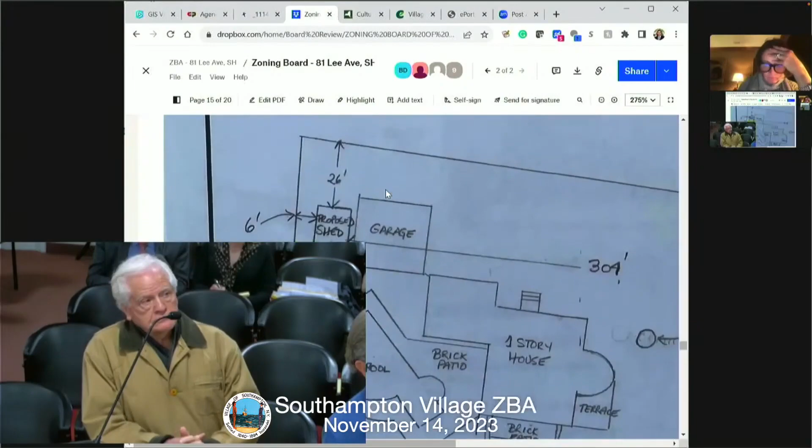Of course. Well, I'm just asking if there's any real inconvenience to you sliding the shed to the south. To the south, to where? I don't have any other location. Well, you're keeping it behind the garage - can you look at this, I mean, the survey, and put the shed maybe south of there, near the pool where there's plenty of room? Alex, I don't think he's actually requesting any relief for his north property line.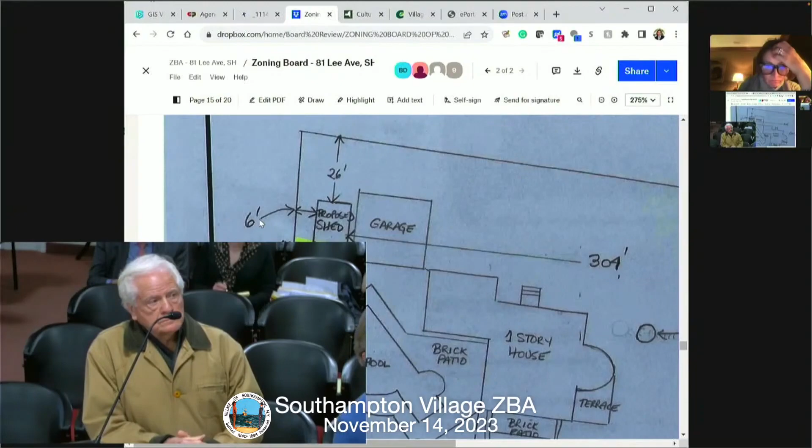Correct, it's shown here as 26 feet from the property line. Yes, okay, the variance is from the westerly property line, where it shows 6 feet.

The other one is 26, I'm complying. And if somebody's seeing the other property, it could probably be me, because when they built that property, they built it at 20 feet, and it's very high. Unfortunately, I didn't say what I was supposed to say at that time.

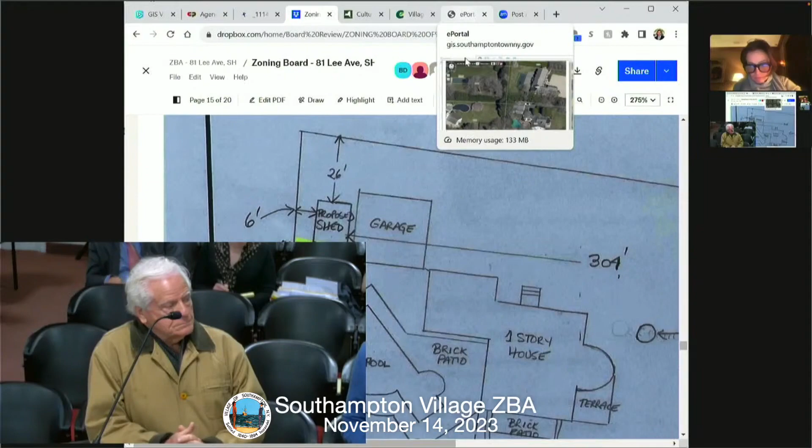But anyway, what's the height of the garage? The height of the garage is probably over 10, they're normally about 12.

12, and what's the height of the proposed shed? The shed is only about 8 feet. No, the shed is 12 feet wide by 16 feet long. I don't see a height listed. It's a very shallow pitched roof, but we need the height.

If we grant the variance, we need elevations. I would say elevations. And are there any photographs which show the extent of the shrubbery between 67 Lee Avenue and this property?

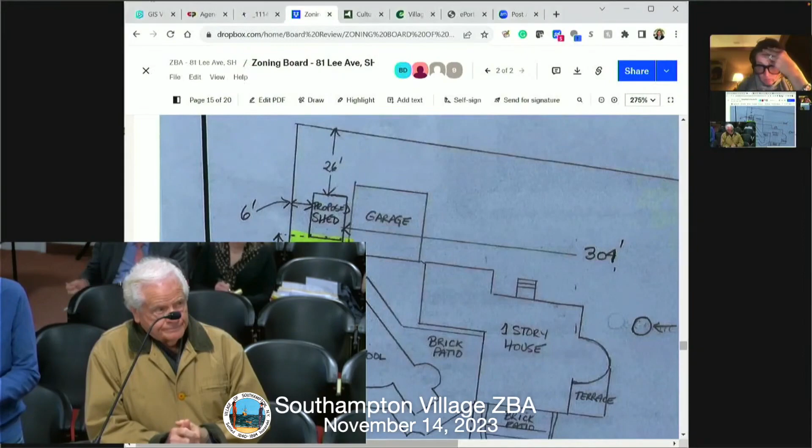Alex, can we show the shrubbery? Are you looking for the aerial view? Or any views from ground level? Only what was submitted with the application.

The height appears to be around 9 feet, but we'll need confirmation. We'll need a real drawing showing that though. I have a drawing, but I can't see the height listed.

Why don't we do this: we're leaning toward approving the variance as long as it's substantially lower than the garage, but we need to see elevations. Is that a fair statement? I didn't mean to speak for everyone, but I agree. I just want to make sure you understand what the request is.

So we just put the shed and the garage as a two-dimensional drawing side by side, and just measure the heights of each. No, but definitely, I think the height of the shed would be less than 3/4 of the garage, even less. Yeah, that's what we just need to see, a visual representation.

It will be helpful for your neighbor too, to understand. And you can probably mail it or email it to him. He was concerned they'd be taking down the trees that are blocking the view. He has some on the fence line, but no, no trees are going to be touched.

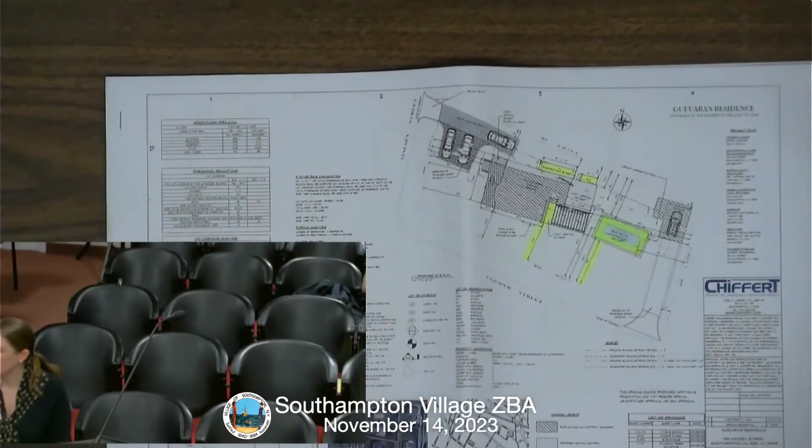Again, I just want some consistency here, and as the way I've understood it. Should I wait for the camera to pick it up? Yes, Sage, can we pick it up? Or Alex, is it easier for you to project it? It's better for the applicant to do it, please, then he can refer specifically to what he's addressing.

Thanks. So the house is - we're holding true, we're going to lift up the house and put a foundation in, so that we're not taking down any part of the house. We're just asking for some additions here. And the only addition that needs relief is this about 90 square feet front yard, which I'll talk about later.

But there are two window wells - stairwells, excuse me - on the north side of the property. One holds, and the house conforms. So it's not the situation before where we wanted to ask for relief and then get the benefit of that practice. The house conforms. One of them, the westerly one, is 3.5 feet into the side yard, and the easterly one is 3 feet into the side yard. To me, that was always consistent. I don't understand the denial letter, because to me that was always consistent with the latitude that the building department gave for stairwells.

For years it's been the custom to allow a 4-foot encroachment into the side yards, such as they did for even more extensive ones for Bilco doors. And then we did find that local law section that Bailey and I were talking about in our last application. It's Local Law 11202, which noted that the restrictions on retaining walls, quote, 'do not include walls supporting subsurface features, including but not limited to stairwells and window wells.' That's an amendment to Village Code 116-112-I.

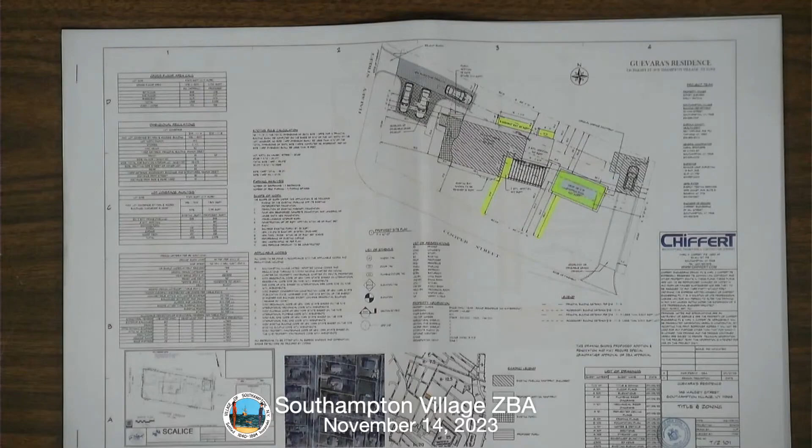So then talking about the relief for the addition, I think it's upstairs, downstairs for a dining room, and it's on the first set of Mark Chiffert's plans. In terms of the floor plans, it's downstairs for a dining room and upstairs for a bathroom -- just this 88 square foot sliver, 44 feet on one side.

Let me make sure the camera can pick it up again. John, can I ask you a favor? As you bounce around, can you reference the line item on the agenda, just so I can follow you? Okay, I usually don't do that. Let me find an agenda. Thank you, do we have a blank copy? Oh, thank you.

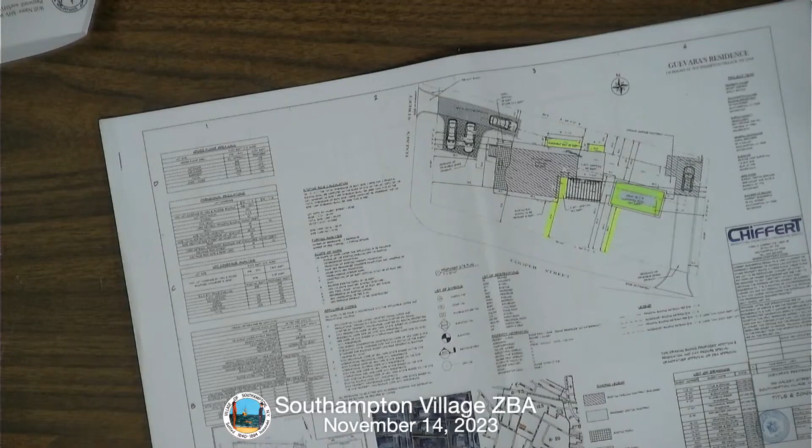So it's number 1, decrease the minimum front yard setback from 30 feet to 21.9 feet for Cooper Street. This is for the sliver of an addition -- the rest of the addition to the north complies, it's just this little sliver. The house itself maintains an existing setback of 17.8 feet, and we want to go to 21.9. 30 feet is required, so we'll be well behind the existing southerly edge of the house.

And it's the type of variance that I've, over the last 40 years, probably been granted 50 times. I'm well behind the pre-existing non-conforming front yard aspect with the addition -- I'm even going less than it, and it's tiny.

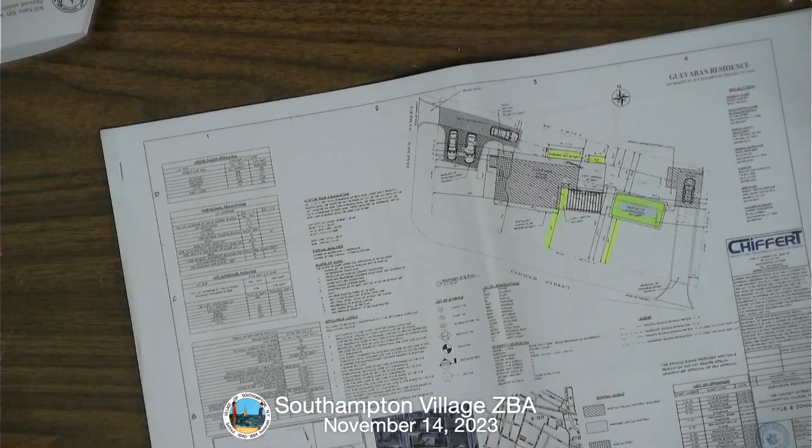Can you go to page L101, because I think it's a larger view of the same image? Yeah, it's in that packet that you're flipping through. Yeah, it's in the back, John. Oh, okay, interesting, we put it after 301.

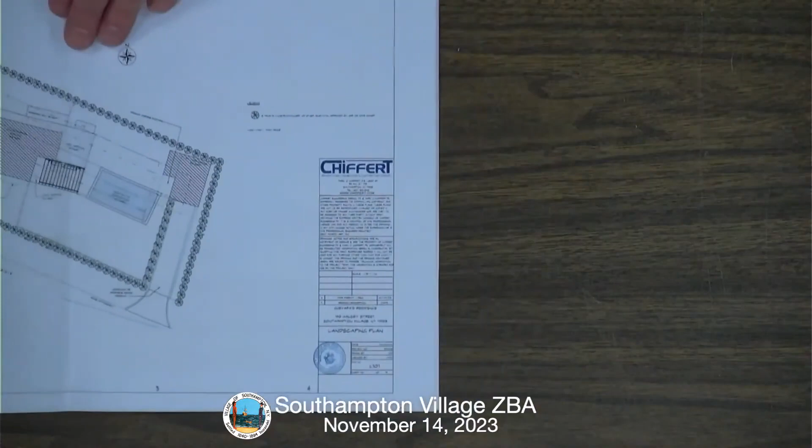Okay, so we see the southernmost red dotted line is the front yard setback. Let's try to get something on the screen so everybody can see it -- that's helpful. So the red dotted line, the southernmost, is the required front yard setback. As you can see, a large portion of the house, because it's well before zoning, probably over 100 years old, is here at the setback -- here's the existing house.

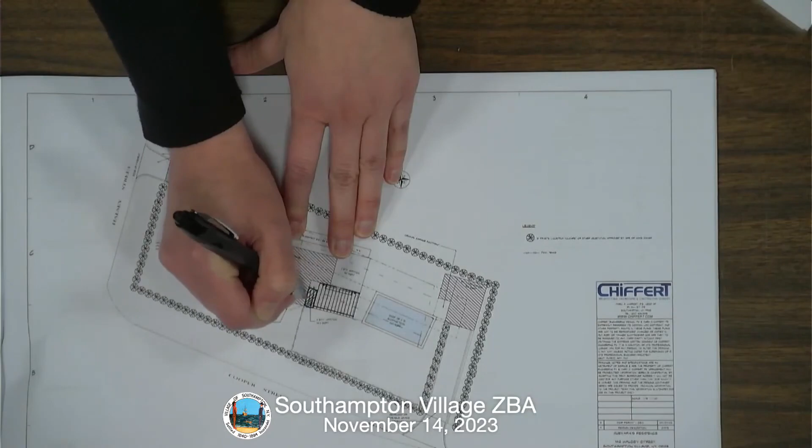So the request is, am I correct, John, that the request is not actually the whole sliver which you represent in solid gray -- it's just about 2/3 of that, from Cooper Street to the first red line, correct. And not just the existing house -- it's in line with the existing house, but because the house is previously nonconforming, it still is. Right, but it's linear, so it's tiny, okay. Clear -- so we don't think that has any impact on the character of the neighborhood.

We don't think it has much impact, it's a very minimal variance. It allows for this addition to be proportionally correct. There's no impact on the environment.

Part and parcel of this building, we're going to put in a new IA system because I think we have a bedroom count issue. I don't want to belabor that unless the board has questions. It's an infinitesimal request that allows for a much more comfortable layout for the dining room and the bedroom, and it's not further encroaching, so it won't impact the neighborhood at all. It's behind the pre-existing non-conforming established front yard, and it's quite small, purposely.

Joyce, do you have any questions, or should we just keep moving? Okay, let's keep moving. I think we should keep moving ahead.

I was gonna say, we might actually get out of here before. My record for this board, by the way, is 4 o'clock in the morning. Seriously? Really? Yes, absolutely. That was about 25 years ago.

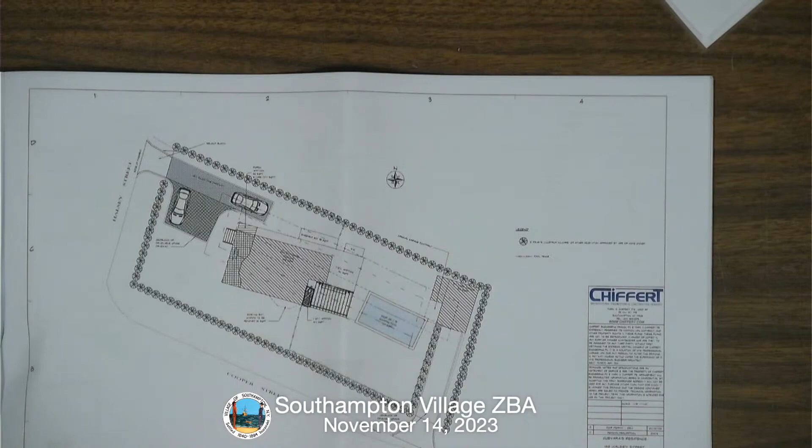If the pool were rotated 90 degrees, right? You may not need to take that chunk out of your garage, and you may open up more of a walkway, void space. I mean, you still need the same variance, yeah, it's still the same variance, but when you look at it, it definitely saves.

It may save some of your garage, and it has the effect of, visually at least, putting the pool further away from the street.

I will definitely go back. Just as a precedent, if we look at our precedents, this board granting 25 feet where 40 is required may conflict with some of our more recent decisions. I might not be able to justify why we would be granting it here, but not having granted it in several other situations.

But I think rotating the pool and moving it north, and maybe playing with the proportion of it, maintaining the same square footage but a little less rectangular and more square, may satisfy Mark's comment, because we've done a lot of pools and tried to stay very consistent.

Let me look at the dimensions of the pool, the orientation of it, and go back to the client, because I don't want to push you guys into an area of uncomfortability. If we can remedy some of that with shifting the orientation, the dimensions, and maybe even a little bit of the size, let me talk to the client about that.